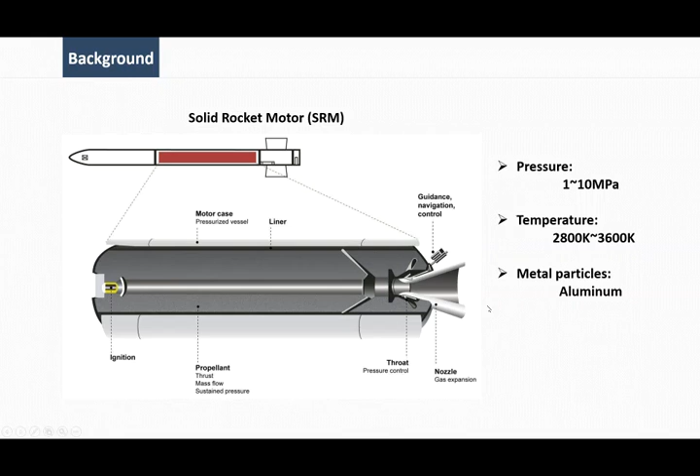SRM works at high pressure and high temperature. The pressure of the combustion chamber is about 10 million Pascal, and the temperature of the combustion chamber is about 3,600 Kelvin. In order to obtain more energy and to suppress the combustion instability, we usually add metal particles into propellant, such as aluminum. At such high pressure and temperature conditions, the metal particles will become droplets. So, studying the droplet evaporation is one important part of the metal combustion.

Usually, we study the droplet evaporation at still conditions, not convection conditions. In still conditions, we use a one-dimensional model to study it. We found that the droplet evaporation is ruled by the D square law. D square law is: the evaporation time is proportional to the square of the diameter, and this one is a constant. We usually call it the evaporation constant. Some researchers found that for aluminum particles an oxide cap will be generated, and this law may not be square. It's about 1.8. The rest is the same as the droplet evaporation.

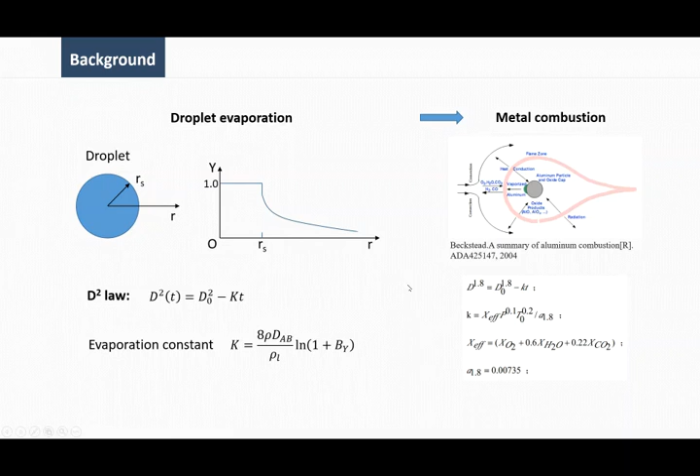In this study, we want to study the mixing of the vapor generated from the surface of the aluminum droplet and the gas with high velocity. So we want to use the LCS, which is Lagrangian coherent structures, as the tool to study the mixture of the vapor and the gas. The definition of LCS is the largest stretching or compressing of material surface in flow field within finite time.

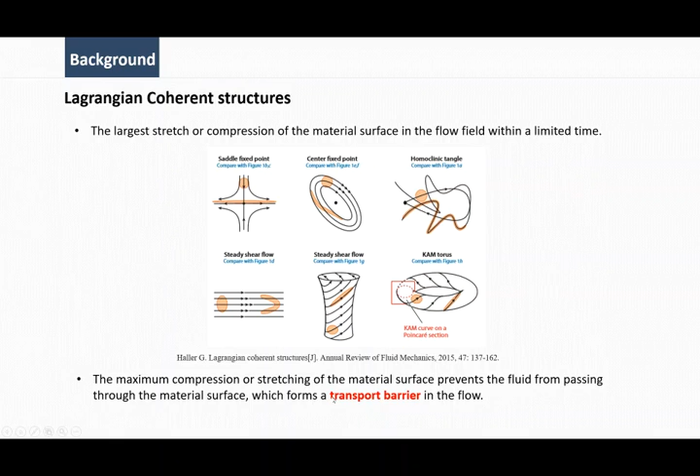And this is some case to illustrate what is the LCS. This work was made by George Haller. And the LCS has a very good property that the maximum compression or stretching of the material surface can prevent the flow from passing through the material surface, which forms a transport barrier in the flow.

And this is our model. This one is an aluminum droplet, and the aluminum droplet in high pressure will evaporate and generate the aluminum vapor. And this is the coming flow. It's high temperature and high pressure gas. For our study, the evaporation time is very short. It's about 0.1 seconds, and the flow past the droplet takes a shorter time. It's about 0.001 seconds. So we can assume that the volume is not changed.

So it's this assumption. The other two assumptions are: we assume the reaction is negligible, so we only focus on the evaporation of the droplet, and the other one is the values of evaporation constant are equal. It means all of these are equal.

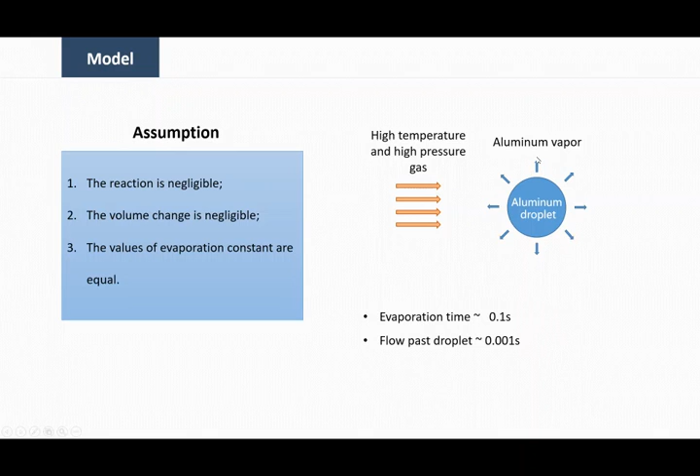This is our mesh, and this part is the mass flow inlet of the gas. The mass flow rate is about 0.4 kilogram per second. And this one is the outlet. And the temperature of the environment is about 2,800 Kelvin, and the pressure is 1 million Pascal. We calculate two cases. In the first one, the mass flow rate is larger. It's about 0.00785 kilogram per second, and the second one is very low.

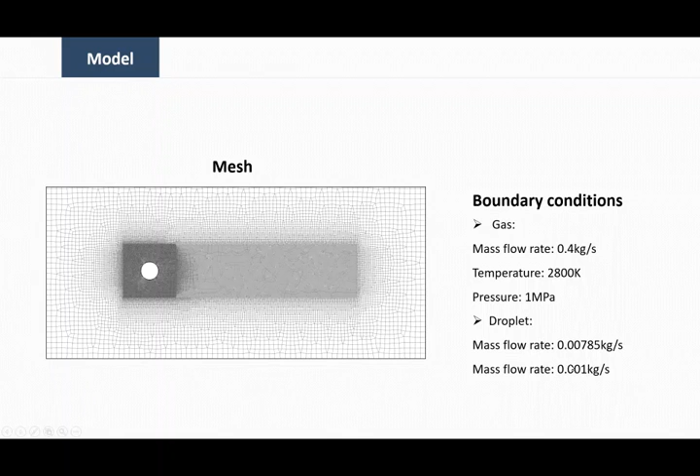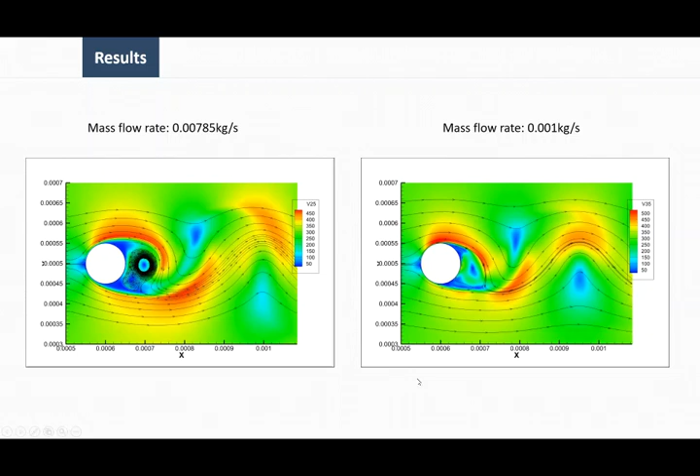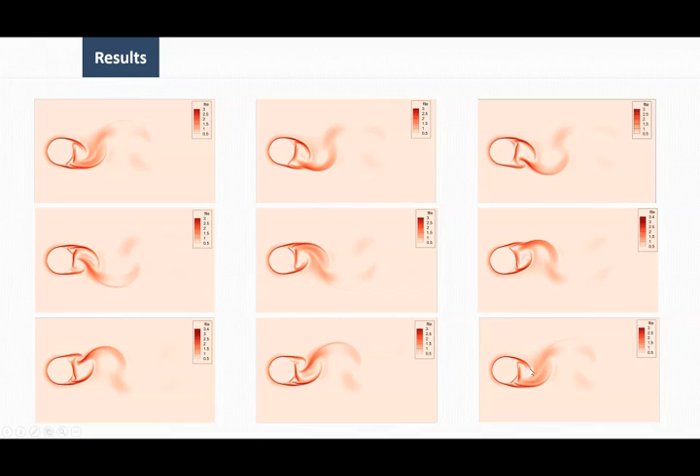And we can see the vapor generated at the surface of the droplet will enter the wake through the tunnel made by the attracting LCS. It will go through this tunnel into this channel into the wake region. And this one is the repelling LCS. Repelling LCS uses the future time. We can see the coming flow can enter the wake region through the tunnel made by the repelling LCS. Here, here, and here.

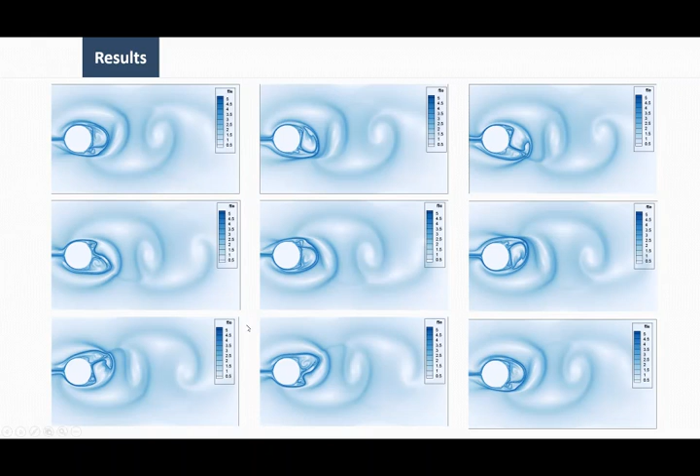So combining the attracting LCS and the repelling LCS, we can obtain 4 conclusions. The first one is there is a strong transport barrier in front of the droplet, preventing the mixing of aluminum vapor and gas. The second one is the aluminum vapor entering the wake through the channel composed of the attracting material line periodically. The third one is the same; it's about the hot gas entering the wake. The last one is the mixing of aluminum vapor and gas happens in the wake of the droplet.